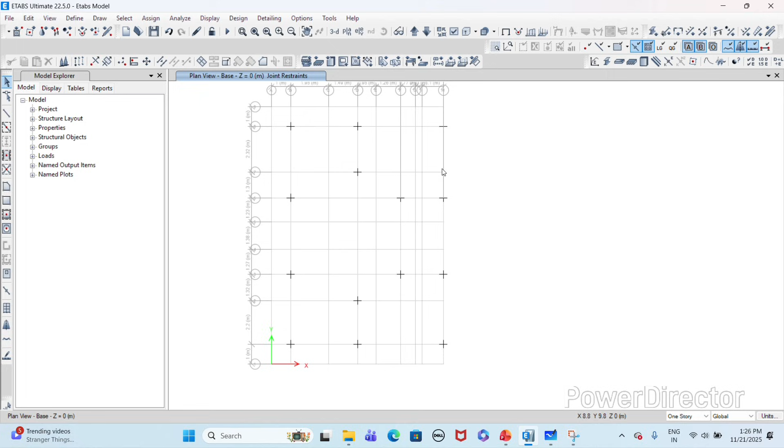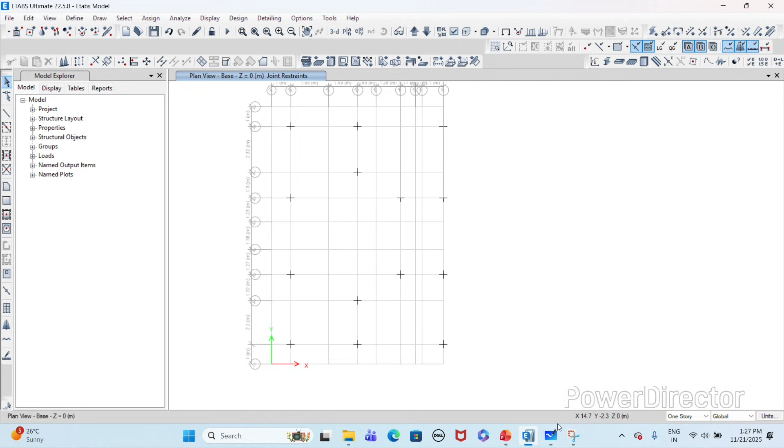This is one of the main topics of today's video. We will see what end releases are, understand the concept, and why we give them in beams. We can give end release to vertical members also, column and shear walls also, but generally we give it to beams only, we avoid it in vertical members. Why do we give end releases? We will see. First I will explain the concept of beams, primary beams and secondary beams.

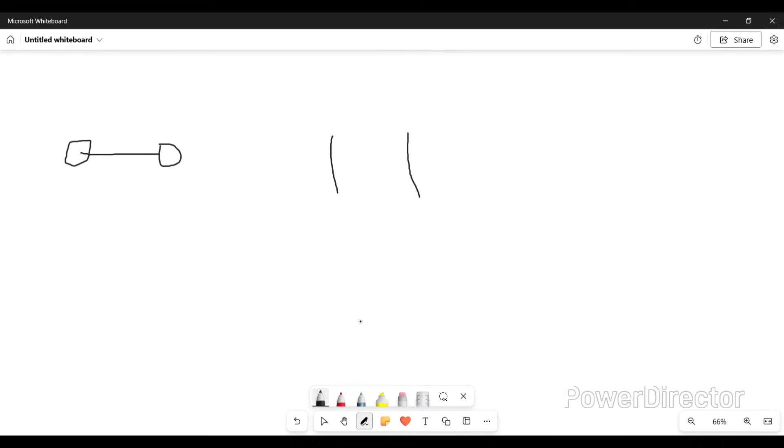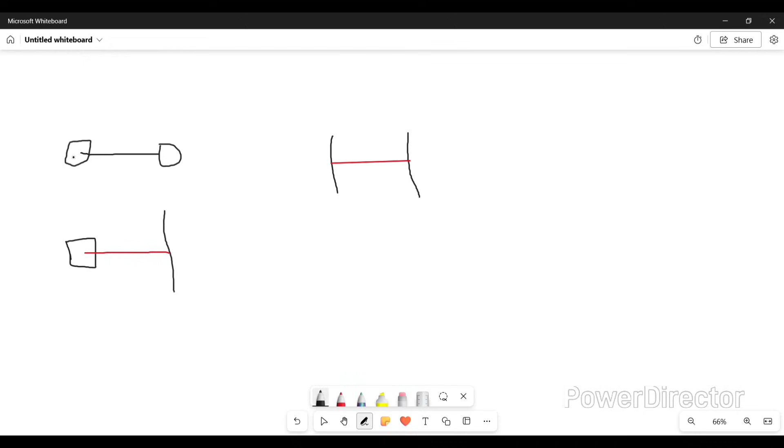So beams are basically classified into two types. I am drawing to explain the concept of primary and secondary beam — beams can be classified into two parts. These are three drawings, three cases. I am denoting the secondary beam by red color. In the first case, directly column to column connection is there, so this is a primary beam. Primary beam basically means the beam which directly rests on vertical members, vertical strong members — meaning the beam which rests on column or shear wall, vertical structural strong members. We basically denote that as a primary beam. I said strong vertical members because there is a concept known as weak beam and strong column concept, which is an important concept according to seismic design or earthquake engineering — if you want, I can also make a video on this. So this is a primary beam.

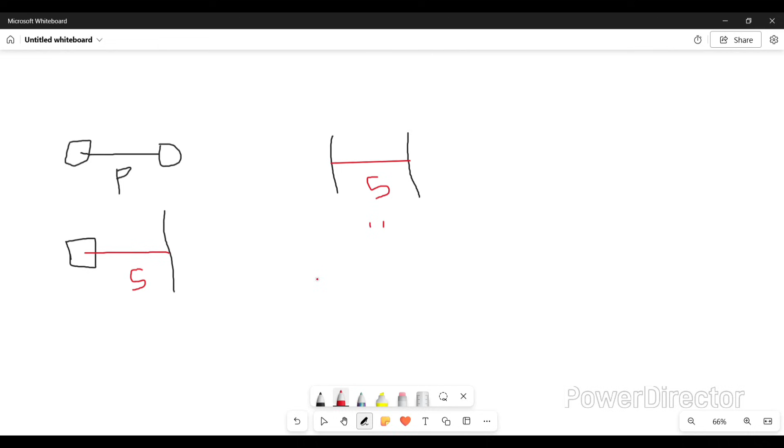But why do we give release to secondary beams only, and not primary beams? I will tell now. First we will see the bending moment — how will be the bending moment of these beams. The bending moment of all three beams will be the same, it will look something like this.

Okay, so the bending moment will be like this. See, this is the hogging moment and this is the sagging moment, or this is negative and this is positive moment. So this is a support moment.

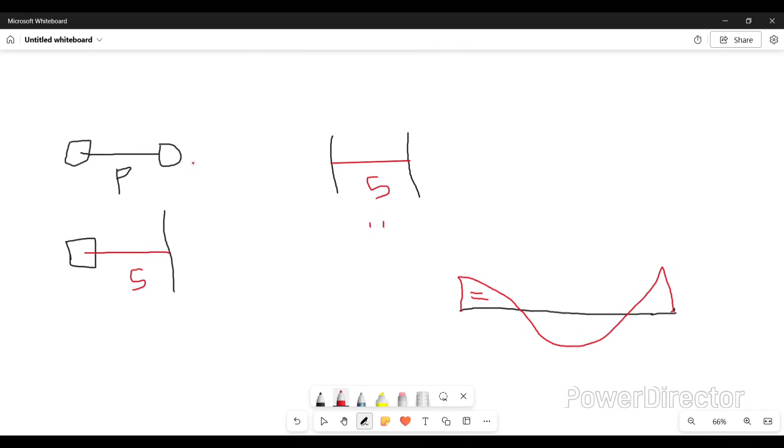Okay, I think the concept is clear. The reason the bending moment will be the same is because in ETABS we consider all the joints or all the connections as rigid. So beam to beam connection will also be rigid, column to beam will also be a rigid or fixed connection, and column to column connection will also be fixed. So for fixed connections there is moment transfer, or support moments also, which I have drawn here. These are the support moments. So this is the BMD.

All three cases will have the same bending moment type, where the support moments will be there, meaning the hogging moment will be there and the sagging moment will be there.

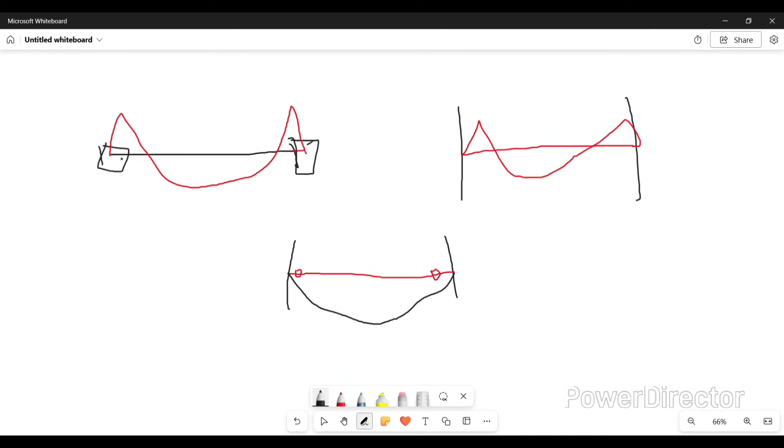See, so here is the main concept now, one of the important points. Consider a beam. If we consider case 1, this is a beam and this is a secondary beam.

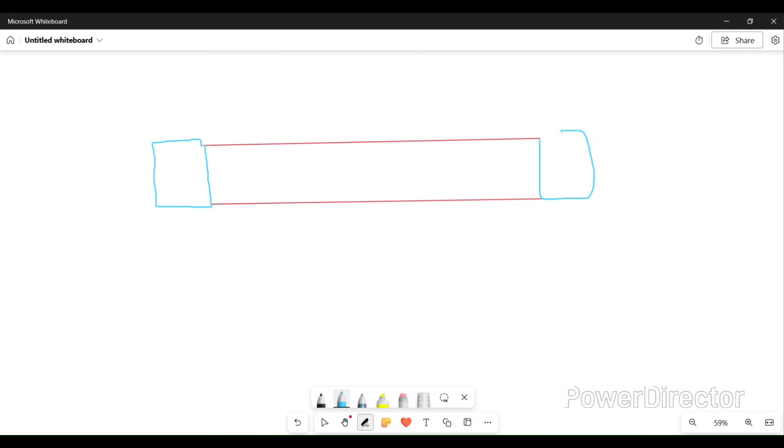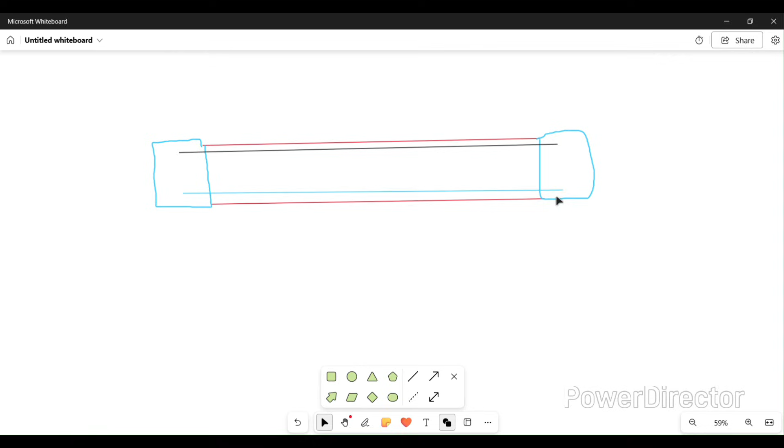Now, if I consider this as a reinforcement, I'm drawing this, suppose this is a secondary beam and this is the reinforcement.

Now in this case what happens is that I don't get proper anchorage length or development length. So for example, if I take the case of our ETABS model, in which I have taken both primary and secondary beams as 230 by 450 mm.

Now if I consider this reinforcement, suppose this reinforcement is of 20 mm diameter or 16 mm diameter.

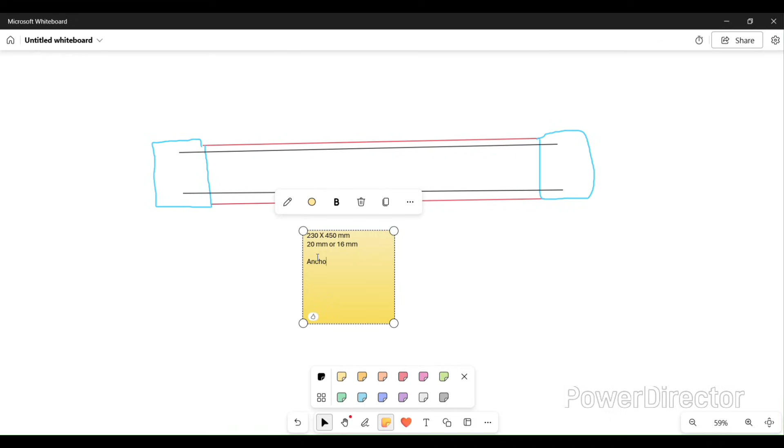So I consider development length general formula, or anchorage length formula. Say I am considering a very general formula, 50d.

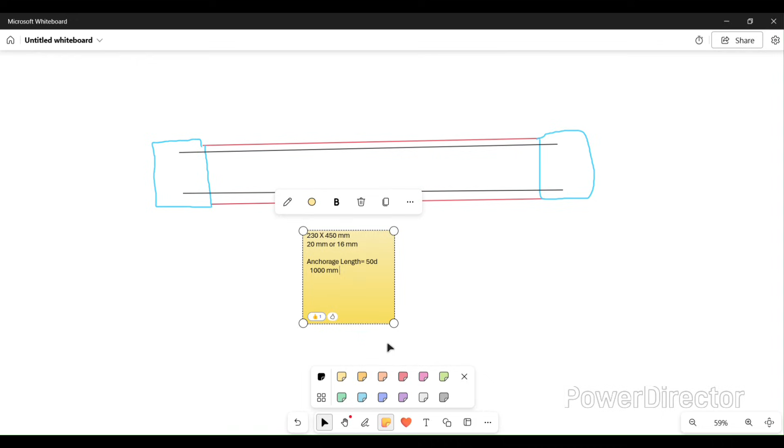So in this case, if this is a secondary beam and this is the anchorage length, in this case we get anchorage length of 1000 mm if I consider a 20 mm bar.

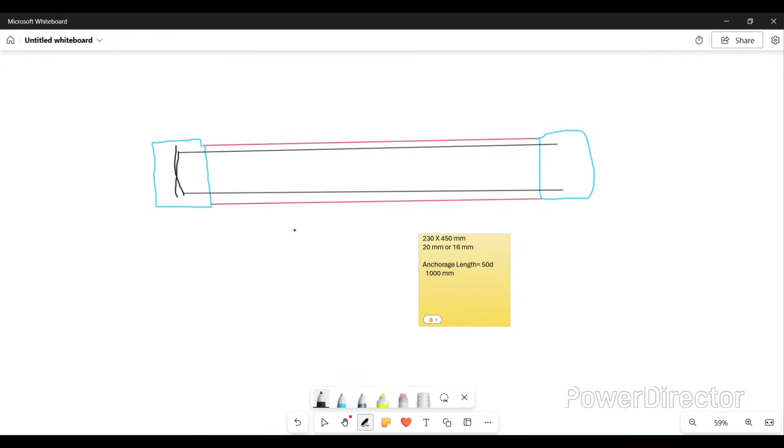So if this is 1000 mm anchorage, we will not get proper anchorage of the secondary beam in the primary beam. If I am not getting proper anchorage of the secondary beam in the primary beam, then there will be no proper moment transfer.

So if there is no proper moment transfer, then hence the reason that the beam is released and it is converted to simply supported. Now if I consider case number 2, I consider this as the primary beam now.

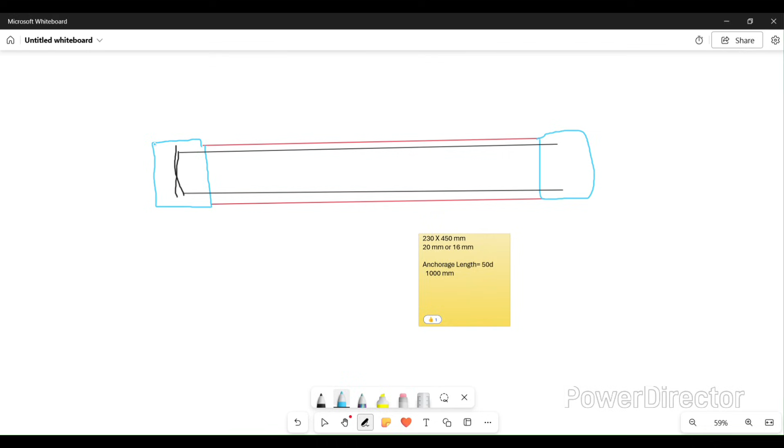And this is a column, suppose. Now in this case I am getting proper anchorage length and the bars are properly anchored into the column. So in this case, this is the primary beam, case number 2.

So in this case we are getting proper anchorage, which means hence the reason that for primary beams we keep them as fixed beams only, we don't release them.

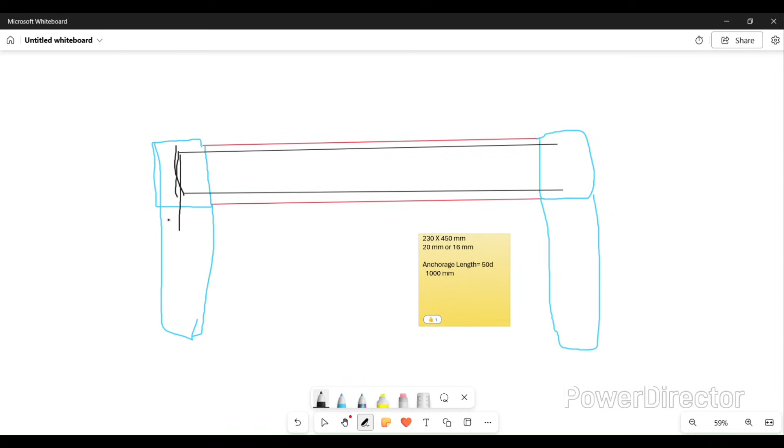So this was the concept of end releases, and this is one of the reasons why proper anchorage length is not achieved practically on site, which is very difficult for proper anchorage length. So this is one of the reasons.

And there are many other factors like stiffness factor for end releases, and moment of inertia is also considered. So all these factors affect the release and affect the beam, hence the end releases are provided. So the anchorage length factor was one of the main concepts.

So now I am directly going to the ETABS model to show how the releases are provided.

Okay, so now this is the ETABS model I open. First I have to select the all-story option because our structure is similar, we have the same frame structure for all floors except the headroom. So here I am selecting the all stories option.

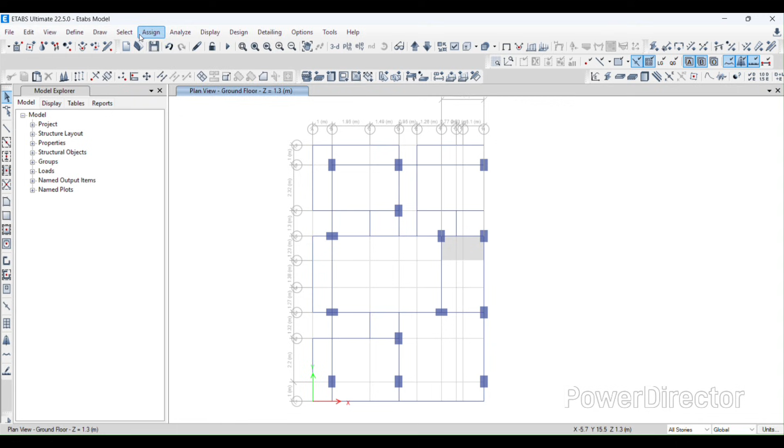Now to assign releases, I am going to Assign, then Frame, then Release Partial Fixity. Here I have to select torsion, and these two moments, moment 2-2 which is the minor moment, and moment 3-3 which is the major moment, and torsion.

These major and minor moments are actually the local axis moments. There is a concept known as global axis, which is this x and y axis, and local axis means every structural member has its own axis, which is the local axis. So these three things we have to select and apply.

So we have to assign releases according to this global axis, where the start is from. If I assign release here, since I have selected all stories, I want to assign the release at this point, so this will come at the start according to this axis. Okay, so the release has been applied.

Similarly, I have to apply release at both points. See, the moments will be applied at both points, but I have to select torsion at one point only, because if I select torsion at both points, the structure will become unstable. So torsion I am selecting at one point only.

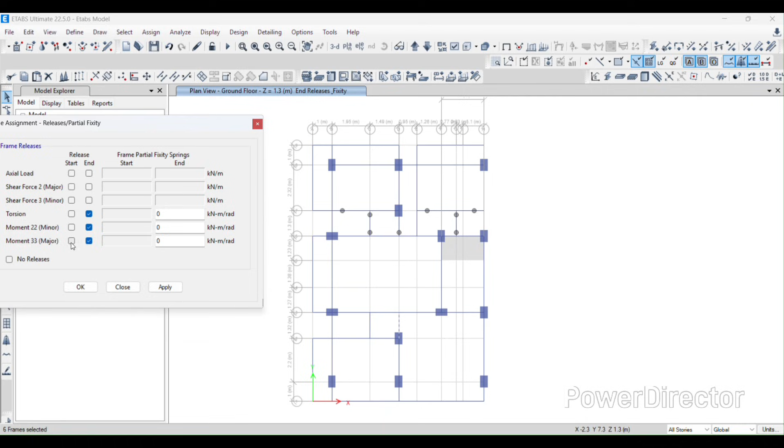I request you to please look properly. Here at both ends. Here also at start only, according to the x-axis.

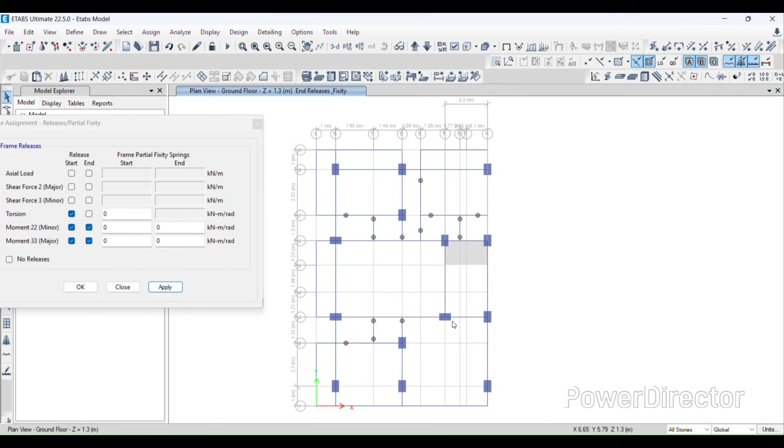Now this beam is remaining, so this will have both end releases. So now release has been applied everywhere.

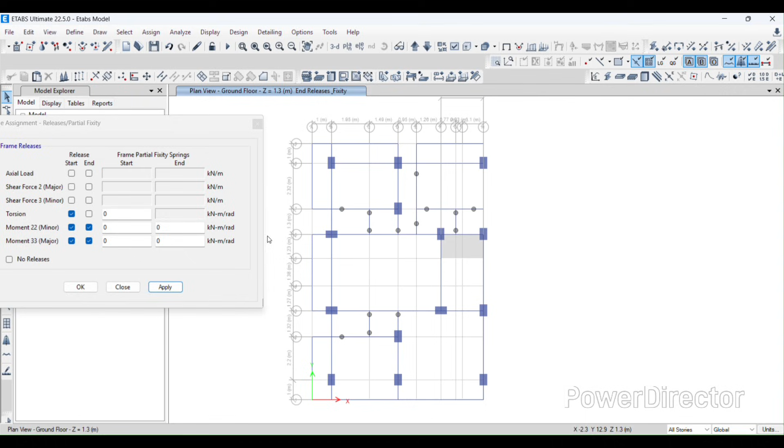See, releases are not applied at the cantilever beams. So this is one of the concepts, that moment releases are not applied at cantilever beams. So these are all the cantilever beams, and hence I am not applying the release here. So now I am going to the first floor.

Okay, so releases are also applied here. No beam is remaining, I think. Is this a beam? Yes. So releases have been applied everywhere. This is the concept of releases.

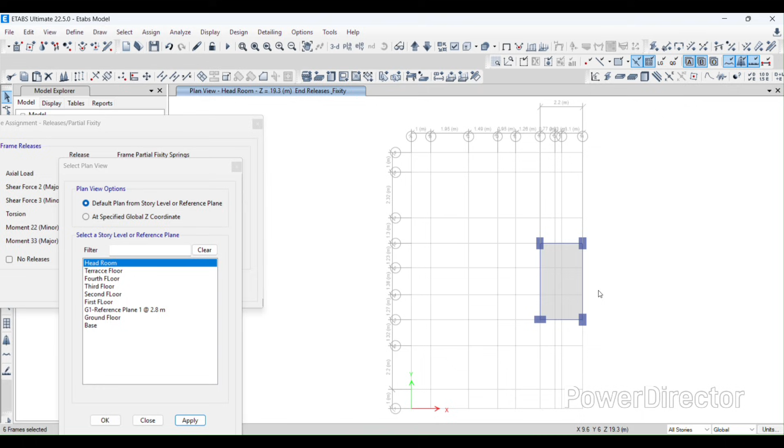Now I go to headroom if there are any. So these are all the beams resting on the column, so no releases are required. This was the concept of releases, for which I have especially made a video. Hope you understand it.

Now we are going to step number 6, third part, which is assigning the diaphragms. So now I am going to assign the diaphragms. I am undeforming it. Releases are assigned, but it is not showing now. Now to assign diaphragms, in the first part of the video we have defined the diaphragms for particular floors first, so now we have to assign them.

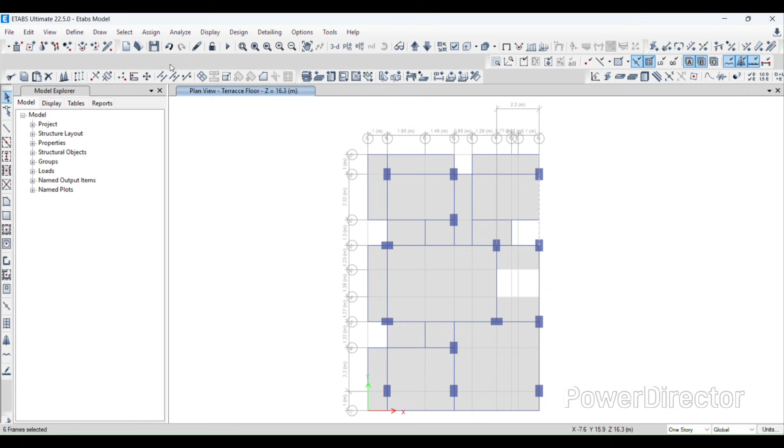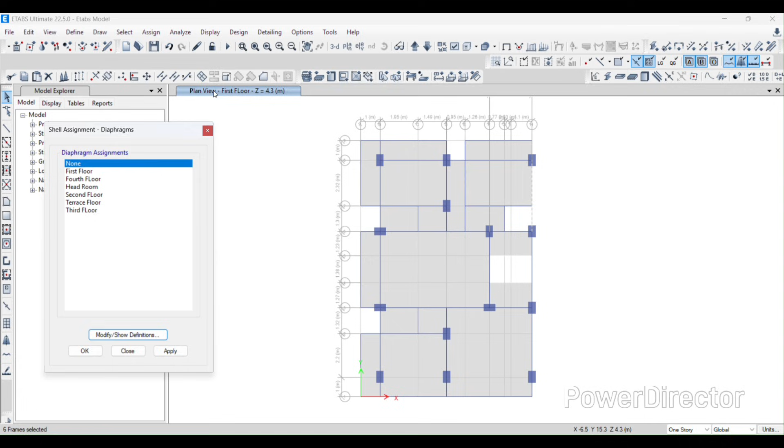Now first we have to select the one story option here. So as we have defined the diaphragms for particular floors, we have to assign them now. I'm going to the first floor, in plan view. So I've come to the first floor, and now I am going to assign, then shell, and to shell diaphragms. Here now I have to select the first floor.

I have to go to select, then go to coordinate specification. See this properly, don't select it as object type, don't select floors as object type. Select it as coordinate specification and click joint in XY plane. Now I am selecting it. See, the one story option is a must. So now I am assigning the diaphragm of the first floor here.

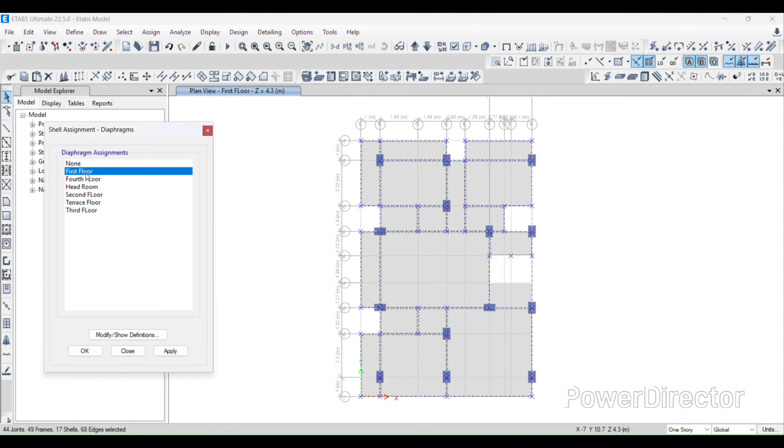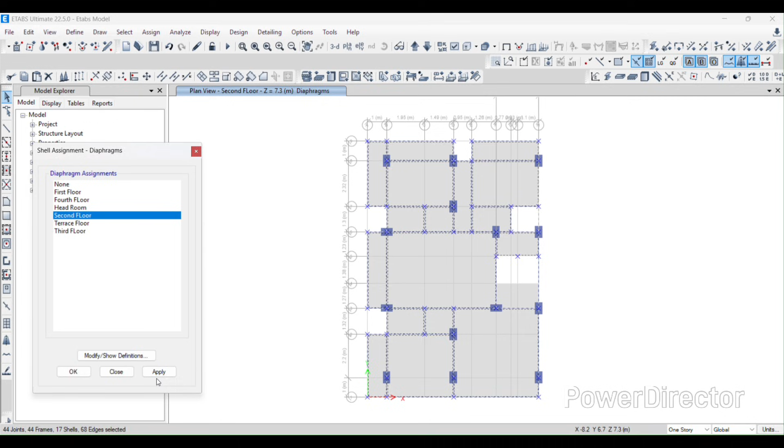So apply. The same steps I have to follow for all the floors now. I am selecting it and going to view. I am going now to select coordinate specification, XY plane. Here, selecting second floor, apply. Now I am going to the third floor.

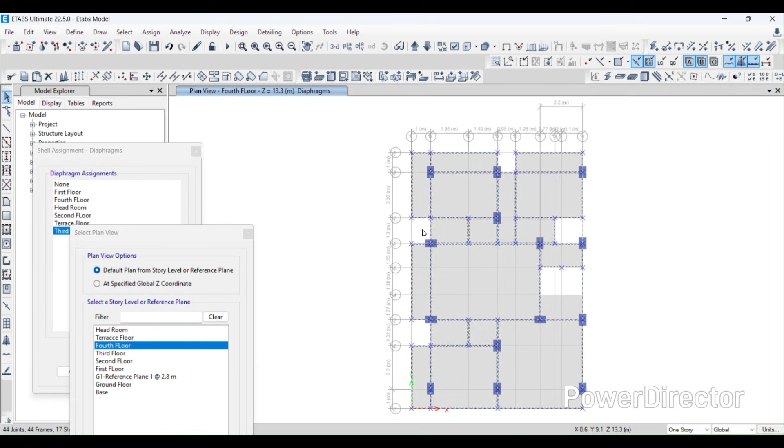One story option is very important here. After going to the third floor, I'm going to coordinate specification, selecting it. So third floor, apply. Now again going to the fourth floor. Selecting it, this is how we have to assign diaphragms to all floors. So I am going to the fourth floor.

Yes, so I am going to the terrace floor. In the terrace floor I am assigning, selecting coordinate specification, XY plane. Applying the diaphragm for terrace floor. Now only headroom is remaining. Select. Similar steps, same steps we are following for all the floors which contain slabs. In the ground floor we did not have slabs, so there is no diaphragm for the ground floor.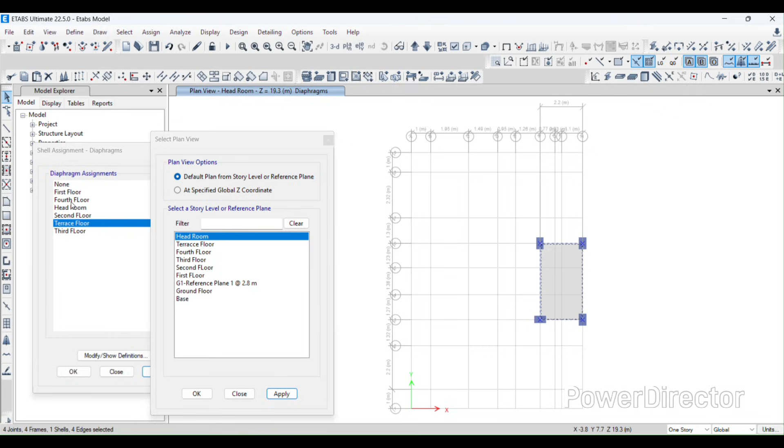Slabs, okay, yes, so now I'm going to headroom, and apply. So the diaphragms which we have defined in the first part of the Etabs tutorial series, we have now assigned them. Now I'm saving the model, saving, save.

So this was the video in which we have totally concentrated on step number 6. Today we completed the entire step number 6, assign conditions to model, in which first we applied support conditions, then the concept of releases to the beam which I have tried to explain, and we have assigned the diaphragms.

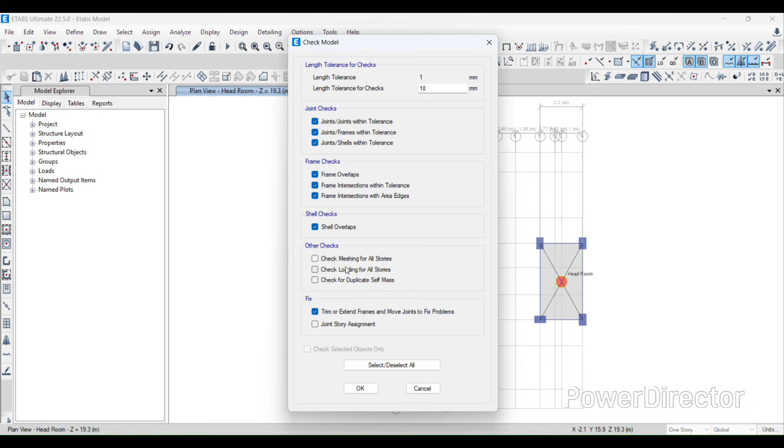Okay, so check model, we have to check the model. I am going to check the model, I have to go to analyze, then check model. Here, as the unit is in mm, I have to select it as 10 mm. Then I have to select all the joints, frames, then shells — we have not done meshing till now, so please don't select meshing here, select joints. So there is no warning in the model, so we have checked the model.

So this was the video. In the next part we will probably see step number 8, step number 9, step number 10 and step number 11. I think this part will also be in one video — load calculations, define load patterns, assign loads and define load combinations.

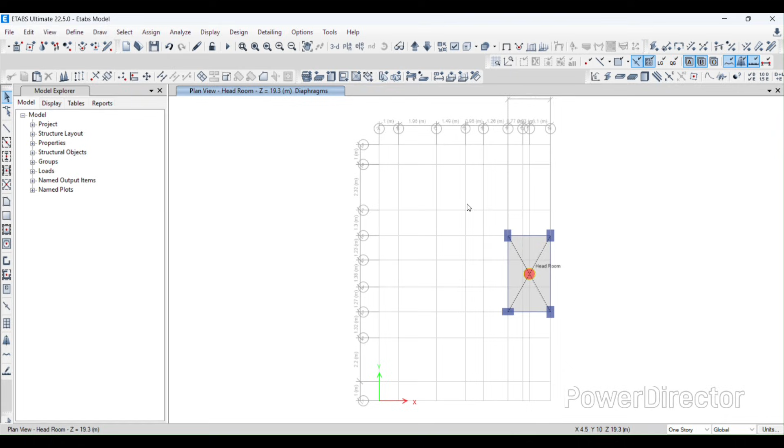I think that the lecture on beam releases and assigning the conditions is helpful for the students or the engineers watching the video.